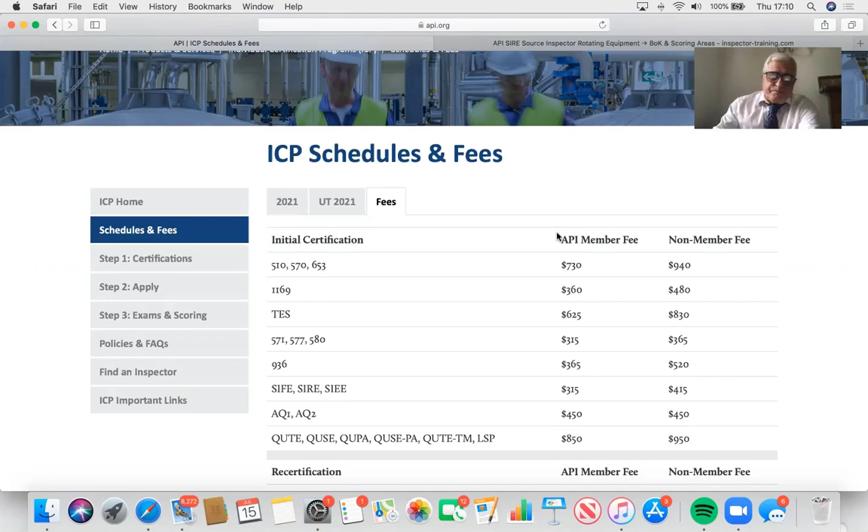Okay, let's go to this certification and see what it's about. So you go to this API ICP, Individual Certification Program, and filter it by API SIRE, Source Inspector Rotating Equipment. You can see here the exam information.

What happens is you have to register with API and provide 2 references. You don't need much pre-qualification; any industry experience is good enough. Then you pay the fees and select a window that you want to attend, and they will send you an email authorization with a link to Prometric, who holds the exam on their behalf.

And because of COVID, they also do remote testing, meaning you can do the test from the comfort of your home or office. If you go in person, they will ask you some security questions. You should have a government-issued photo ID, and it should not be expired.

We had candidates who went there with an expired driving license, and they were refused entry and had to give the exam 6 months later. So be careful. As a plan B, have two government-issued IDs, like a driving license and a passport, and both should be in date.

So they will ask you a few security questions. They'll ask you to lift your trousers so they can see that you are not hiding anything, or on your sleeves, or on your foot. And they will ask your date of birth or email address. They take a picture, and then they will direct you to your seat to start the exam.

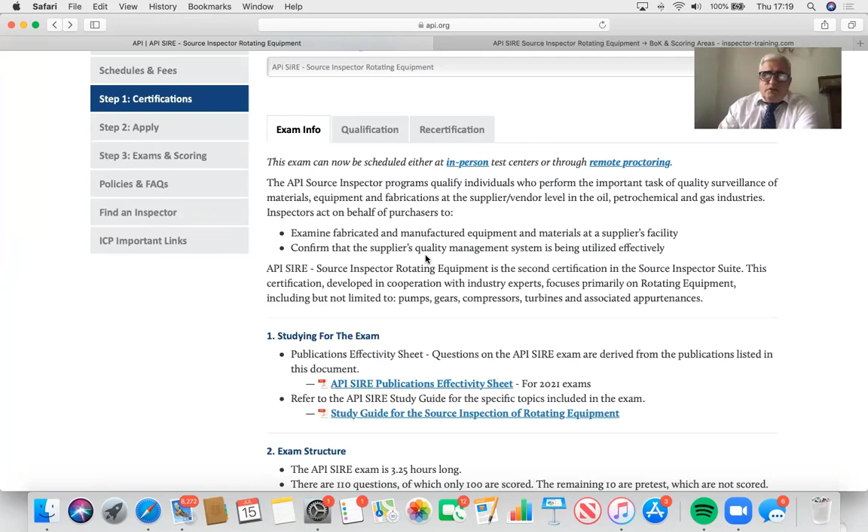Then you can see the list of documents that you have studied. Remember, documents like API 610 for centrifugal pumps, 611 for general purpose steam turbines, 614 for lubrication auxiliaries like lube oil, 617 for axial and centrifugal compressors, etc., and 618 for reciprocating compressors. For most of them, you have to concentrate on section 6 for inspection, because you're looking at this document from an inspection point of view.

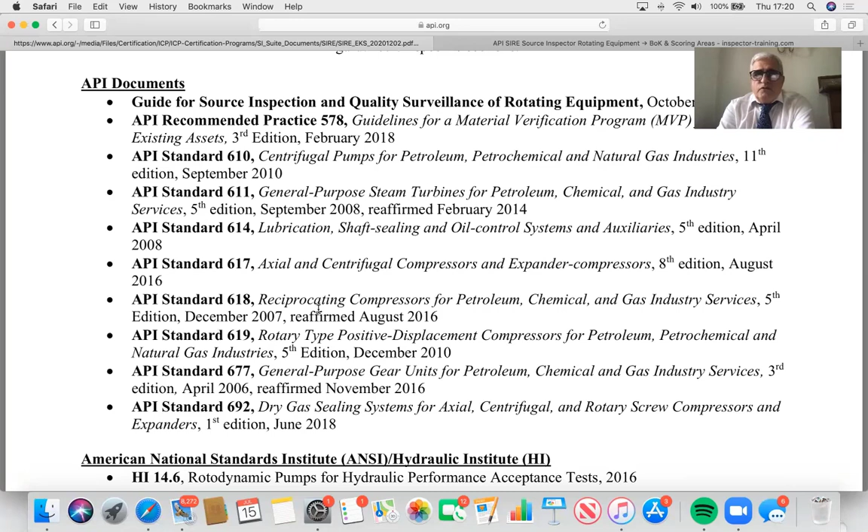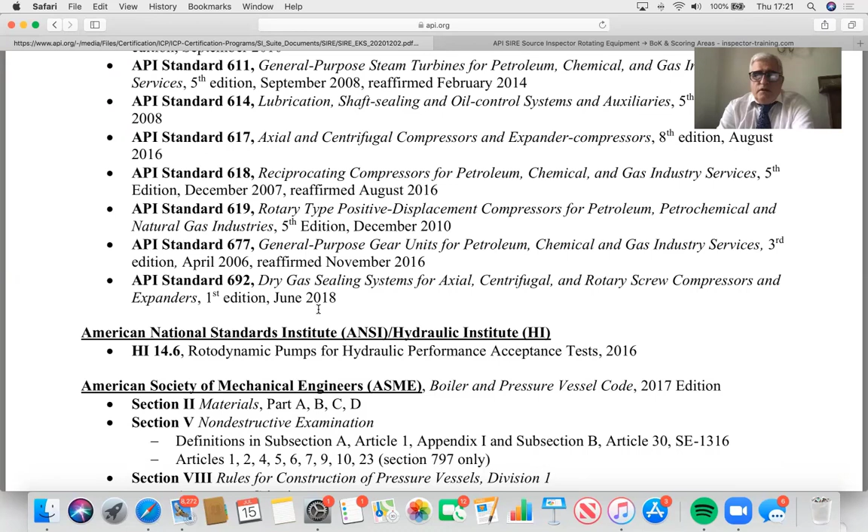And then the all-important HI 14.6, which is the pump test, and it's widely used in the industry. You should also know about materials.

It would be very basic knowledge, ASME section 2, and about non-destructive examination, the articles 1, 2, 4, 5, up to 23. This is very basic. You should know what a procedure looks like, what a report looks like for NDE. You should know what to see in a report, since you're not an ND examiner, as I said, but you should know how these different ND methods work.

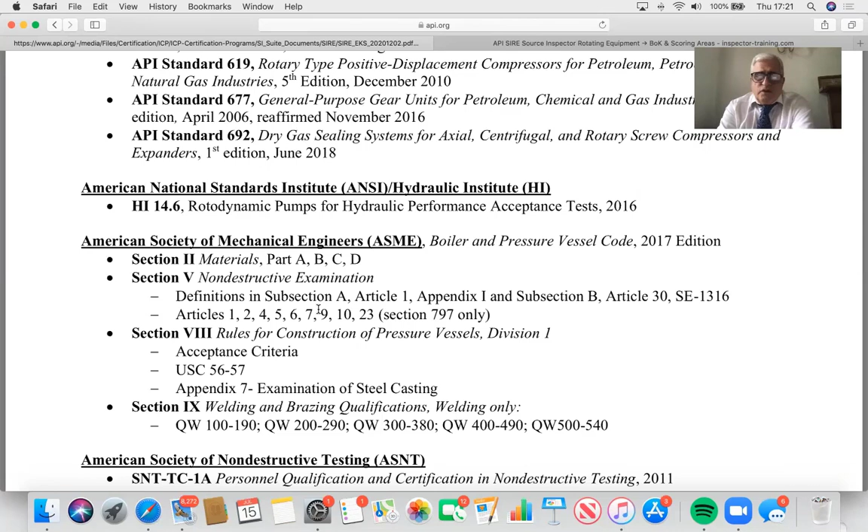And then section 8, rules for construction of pressure vessels, explains exactly what you see—it's a small thing like acceptance criteria. For example, the ND procedure should be written according to ASME section 5, but the acceptance criteria is in ASME section 8. Even for most pumps, the acceptance criteria for ND is in ASME section 8.

Then ASME section 9, you should know what a WPS is, and you have to study these clauses, QW 100 up to QW 500 and 540.

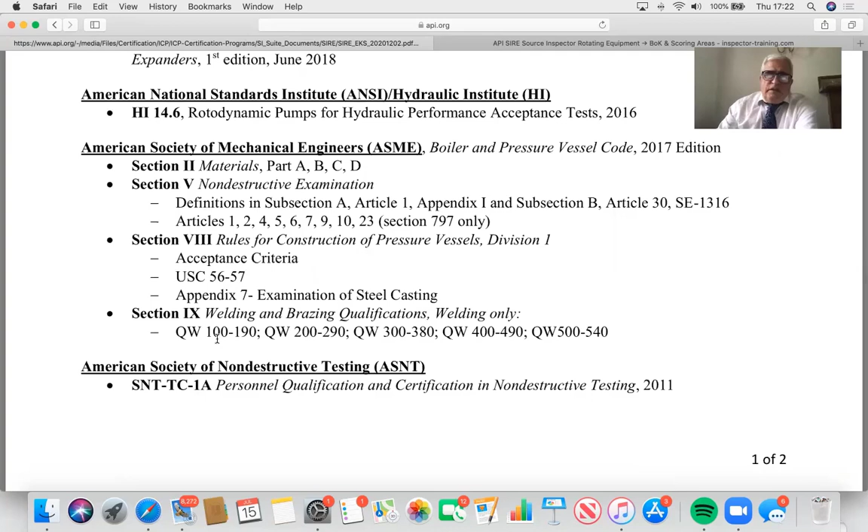And for personnel qualification, you should know the duties of a level 1, level 2, level 3, the eye test, colorblind test, that sort of thing.

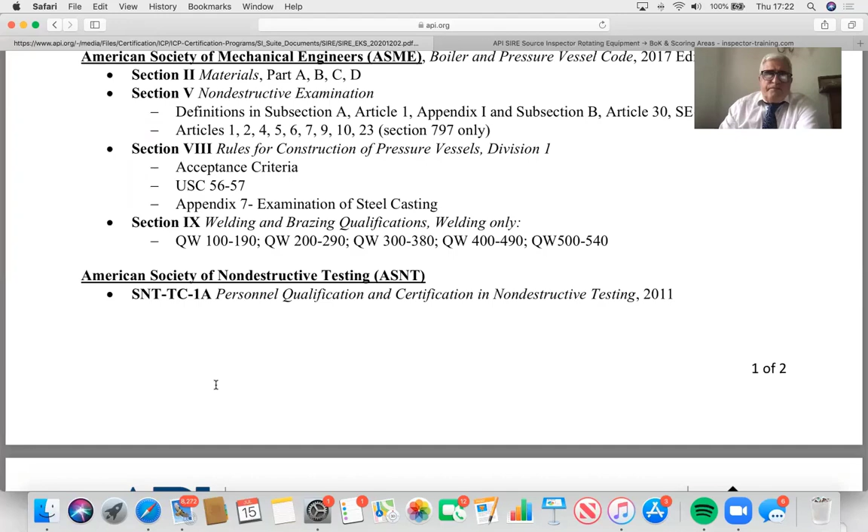Then there is a section for ASTM A703, casting for pressure containing parts, which is widely used in the industry. Also MSS SP55, again a casting quality standard with some 65 pictures, but you should know the very basics—casting defects like shrinkages, pores, that sort of thing.

Lastly, you need to know about various surface preparation guides for coating. For example, the question could be as simple as: what is the code for white metal blast cleaning? And it's NACE 1 or SP5.

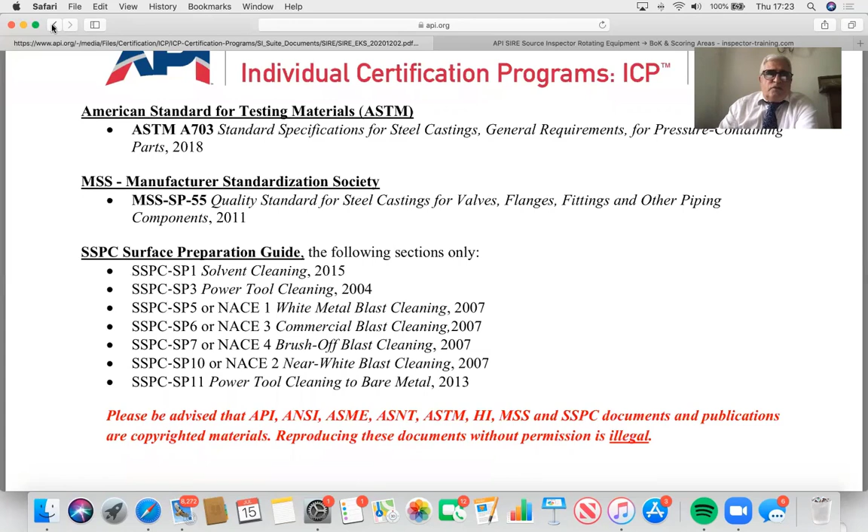Okay, let's go back to the all-important document. Between all these documents is that study guide, the 578 we just talked about. This is very important. It's free to use for all, and I would say around 40-45% of questions come from this.

So I'll go quickly through that. It's definition and abbreviation, training - when you go to a site, you should know that the vendor has kept the certification of all their personnel, NDE, welding, coating, and that they've gone through sufficient training. The source inspection management program is not widely known, but it's not widely used in industry either. This practically means you should have a plan and a program for how you're going to manage the source inspection. If you see a non-conformity, what would you do, how would you contact the vendor.

So that would be project specific, for when you're going to visit. Planning activities is as good as putting a calendar and saying, okay, on these days I'm going to visit this based on their inspection test plan and fabrication progress, and the ITP intervention point - inspection test plan.

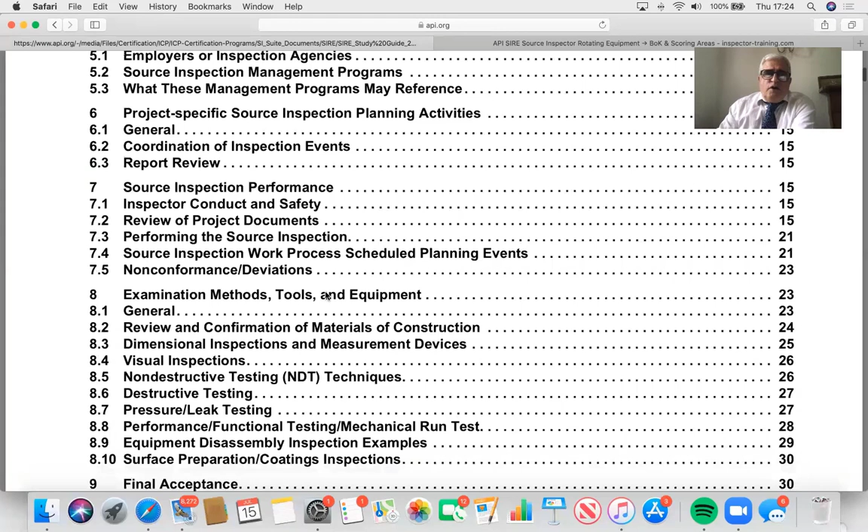And then performance is how you have to conduct yourself as a source inspector. You should never be argumentative. If you don't agree, raise the matter, and if you're not satisfied, go to your supervisor. This might be a potential question. You should observe the safety of the site and the factory, and know what documents you have to review, like most of the test reports - hydrostatic, leak test, NDE, welding, etc.

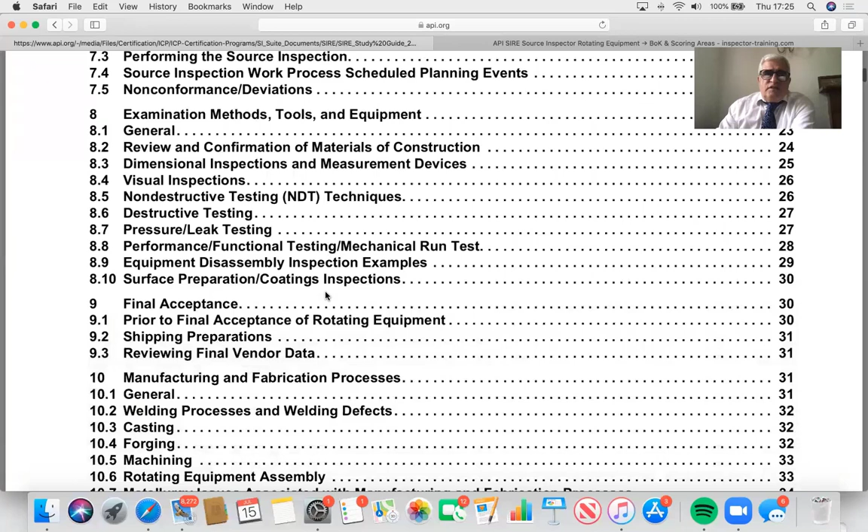And then how to perform the source inspection - examination methods, tools, and equipment. As I said, you should know about this, you don't need to be a welding inspector or NDT examiner, but you should know how this works. There's always a procedure - you should know what elements should be in the procedure, is it approved, are they working according to the procedure, and what you should see in the NDE report, in the welding report, etc.

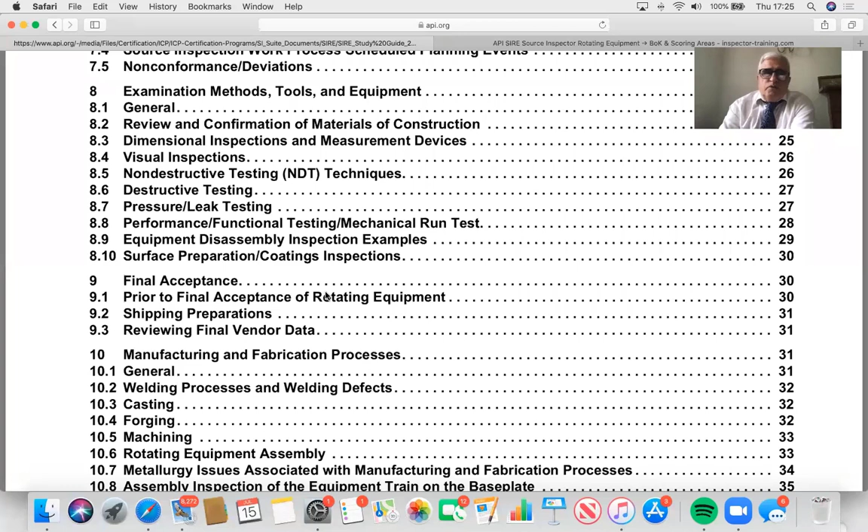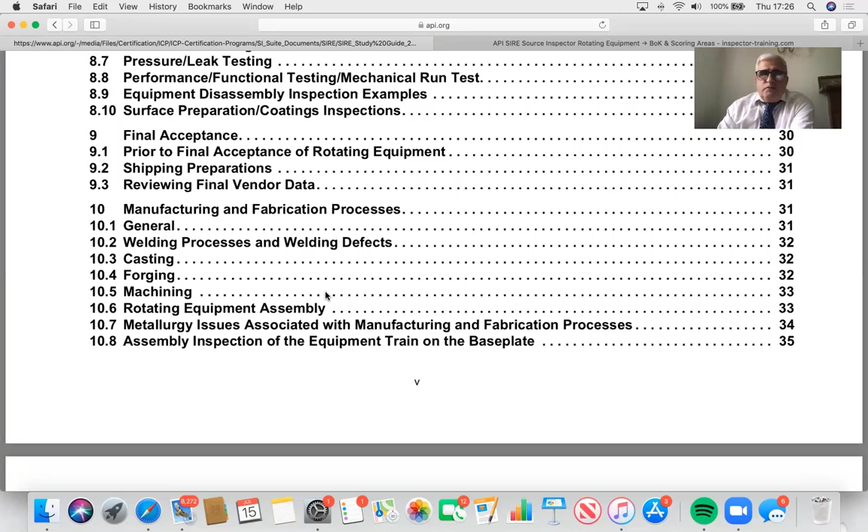And then the final acceptance would tell you what you need to see, especially the shipping preparation, and it's more or less the same for all types of rotating equipment across all these standards that you see, like 610, 611. And then you should know, obviously, about manufacturing fabrication processes like casting, forging, drilling, machining, and welding process. So very basic things.

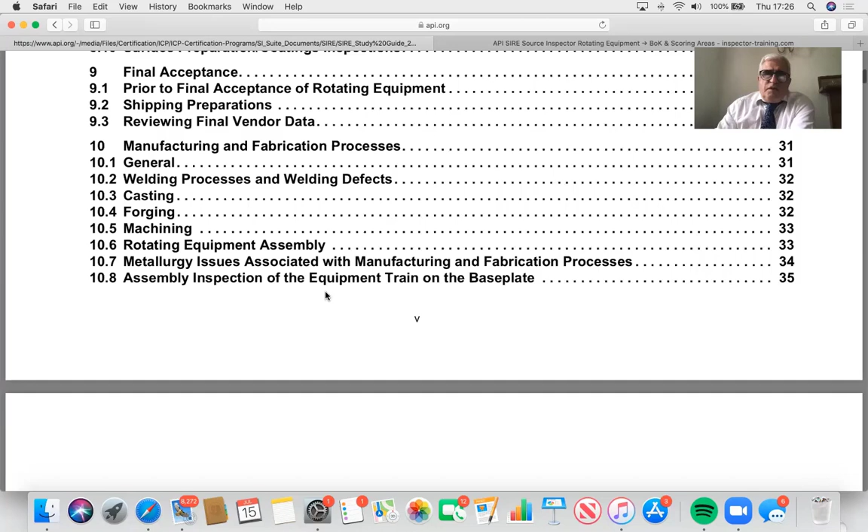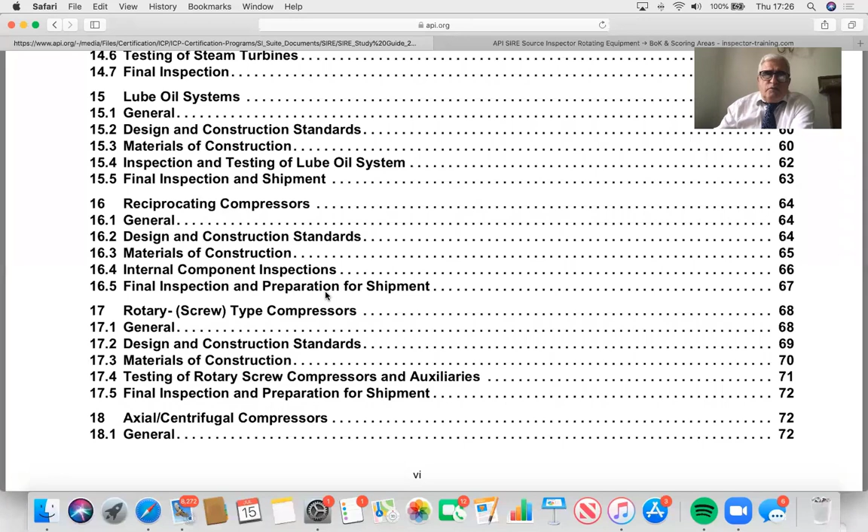And then it talks about all rotating equipment - centrifugal pumps, drivers, gears, steam turbines, lube oil system for big compressors that need to be cooled off, like a radiator, reciprocating compressors, rotary and axial, and the rest. And there would be a few photos. So I strongly recommend this - you would probably receive around 40% of questions from this document alone.

So about pre-qualification, any experience in the petroleum petrochemical industry would do. They didn't mention the date, like how many years you should have. And this is about the exam.

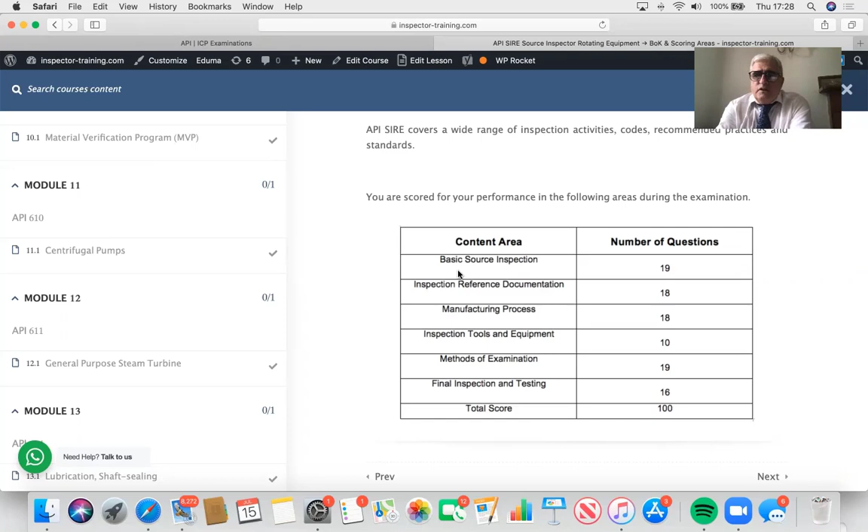Previously, they used to immediately send you a preliminary pass or fail, but it seems they stopped that, as far as I know. And then, as you see here, on basic source inspection, the maximum number of questions out of 100 scored questions is 19. Inspection reference documentation is 18. Manufacturing process, 18 questions would come, more or less. Inspection tools and equipment, 10. Methods of examination is 19. And final inspection and testing is 16. That's roughly how it's shared between all these topics.

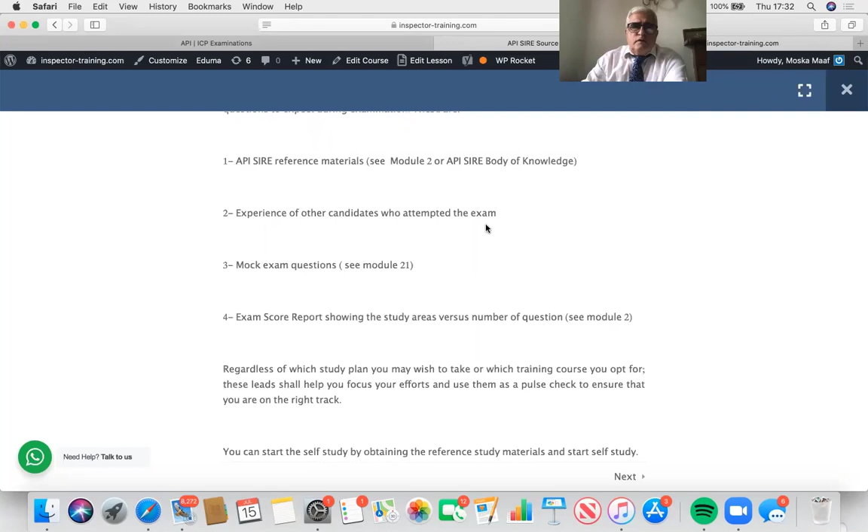And then our second option, you can go to the next, which is our benchmark quiz, or you can go from overview. You click here, and you can start the test for free.

As you can see here, we have put the percentage of your progress, and there is a next button, and you can also see the answer, obviously, but during the exam you can't see that.

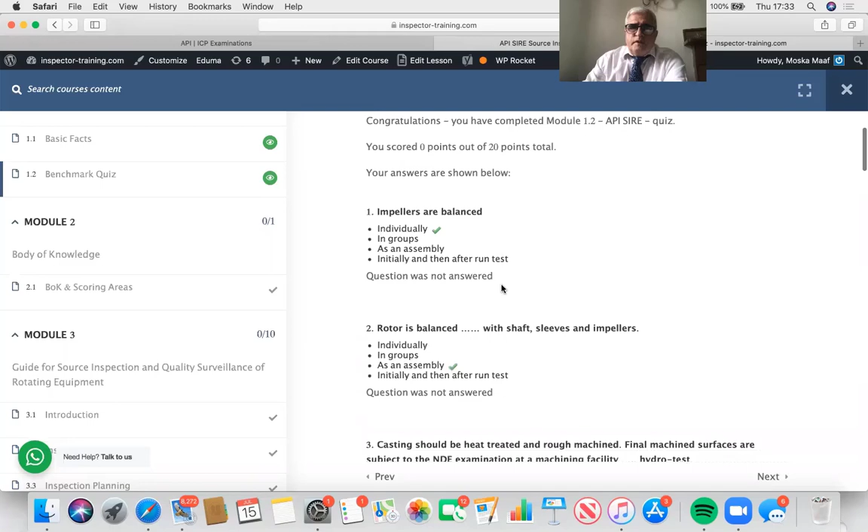And for each question... now I have run out of time because I tried this again, so I will show you some other questions that I've already done before. So you'll see that we have the body of knowledge scoring area.

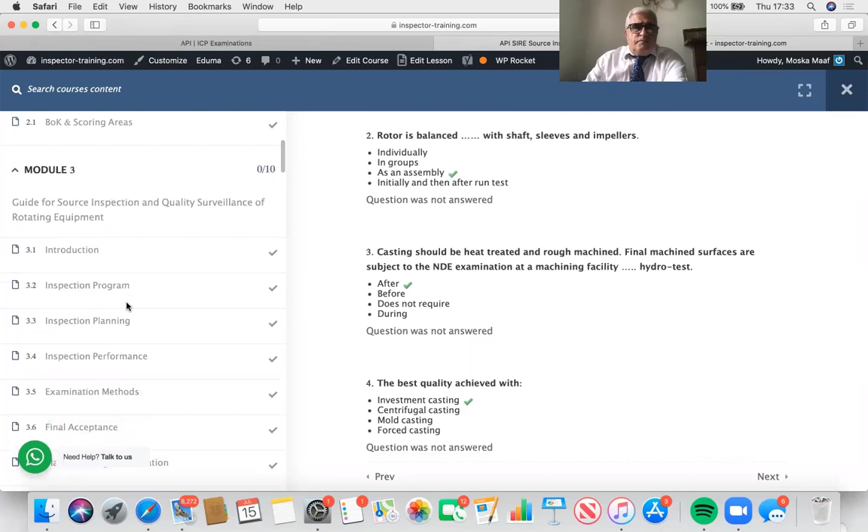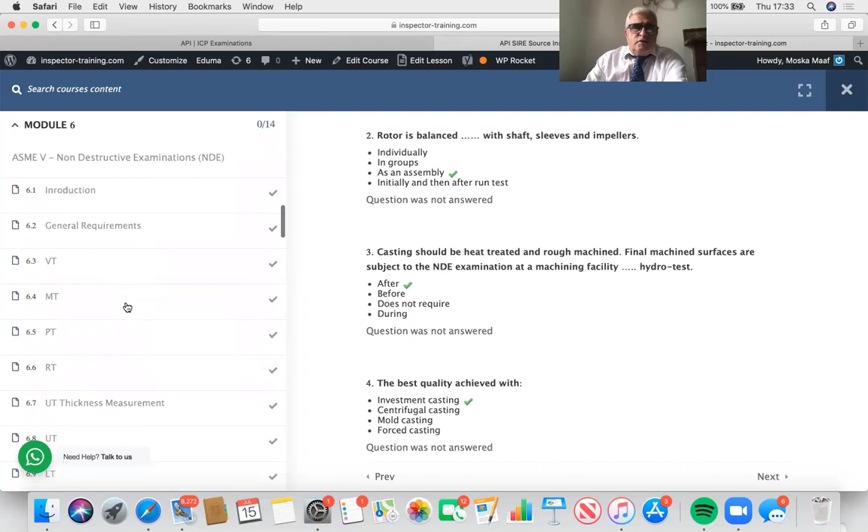Module 3 is about surveillance inspection of that guide 578, and SSPC, MSS, and ASME section 2 materials, non-destructive examination, ASME 5, NDT personnel certification, welding, construction code ASME section 8, 578, material verification program, or PMI as we all know it.

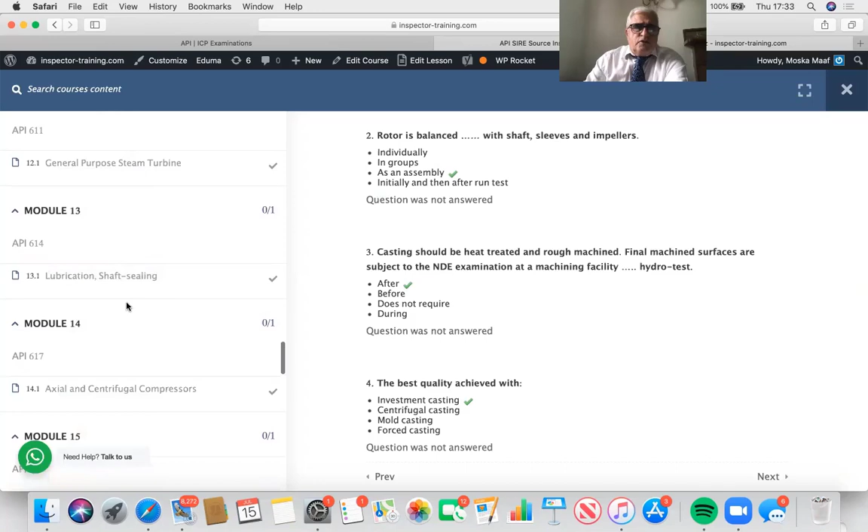And each of these, rotating equipment one by one, we have explained in detail, just sufficient enough for your exam actually. And then we have flashcards that are potential exam questions.

And then say if you click on one of our mock exams, say this one, you can see that this is exactly designed as per the API. So we have here the next and previous buttons, we have the timing—it's 195 minutes, but we increased the number of questions here to 145 questions, I guess.

As you can see, the progress is shown here, and you have next and see answer options, but obviously you won't see the answer there. So you can go to the next question.

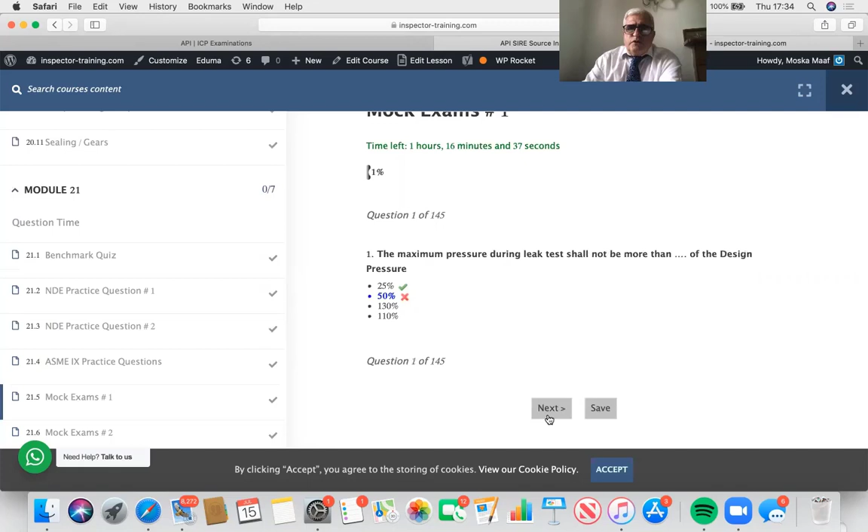Okay, I've run out of time on this one also, I think. And then you can flag it off like in the API exam, and then click on this and go to the next.

At the end, you can see which question you didn't answer correctly and how much you scored. And you can do it again and again for 4 months, 24/7.